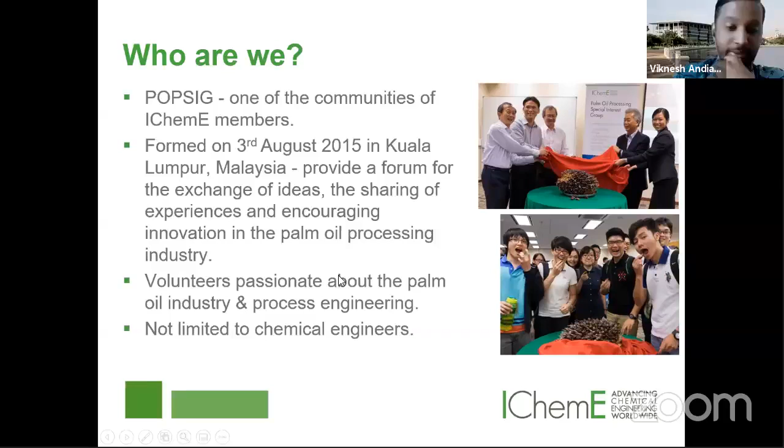We have a lot of volunteers who are passionate from the palm oil industry and from process engineering as well. So a lot of chemical engineers who apply their trade in the palm oil industry come together in our committee or in our events and exchange ideas. But of course, we're not just limited to chemical engineers. And since we were formed in 2015, just last year we celebrated our 5th year anniversary. So this will be our 6th year, since it's already 2021.

What are our objectives as a special interest group? Number one is to share and promote best practices, particularly in the palm oil industry. It's also to encourage innovation. So we'll see what activities we normally run and how you guys can get involved in our activities as well.

So we encourage innovation in palm oil products. Apart from that, we also promote professional aspects in the industry, and we act as a focal point for those interested in the process aspect. Since we are stemming from IChemE, an institute where a lot of chemical engineers come together, we look at the process aspect of palm oil processing.

So what are the activities that help us achieve our objectives? We have technical seminars that we've organized, forums as well, workshops, and in fact webinars and physical evening talks. Before the pandemic, we used to have physical talks, probably once a month on a Monday evening. But since the pandemic, we've converted that into webinars. So every now and then, if you're a student member, you would get advertisements or emails from IChemE about the webinars we organize.

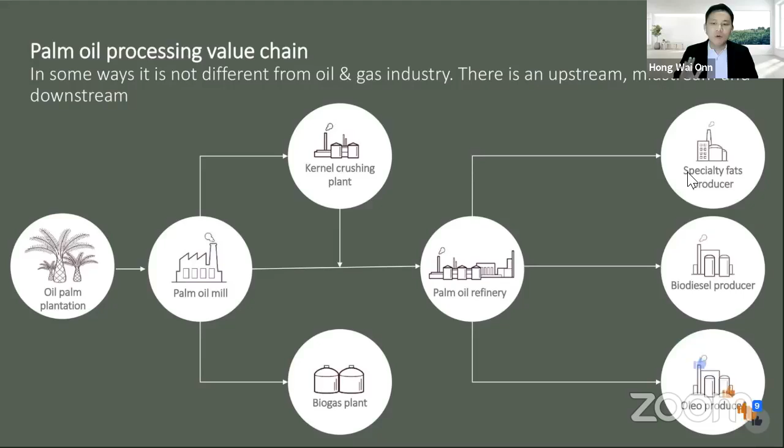In terms of usage, about 70% of palm oil is used in the food industry, maybe 10% in oleochemicals, and the remaining 20% in the energy sector, for example biodiesel.

From a helicopter viewpoint, the palm oil mill produces crude palm oil and palm kernel as primary products. There are a lot of unit operations involved in the palm oil milling process, and trust me, many of them are relevant to chemical engineers. Why? Mass transfer, heat transfer, thermodynamics, which I will cover later.

Let's shift gears a little bit. The oil refinery produces refined oil from crude palm oil and palm kernel oil. The refined oil will go through the fractionation process to separate stearin and olein.

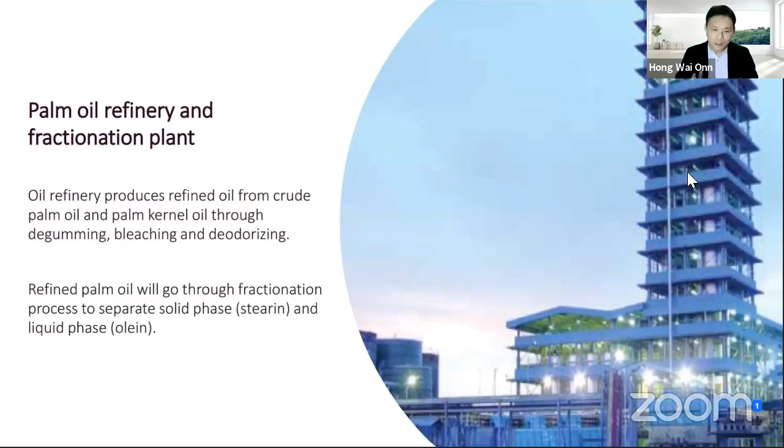Now, come to the fractionation process, or the separation process. Stearin and olein will be separated by means of thermomechanical processes, and typically the final product stearin will be used for margarine production, while olein is widely used in cooking oil and frying oil.

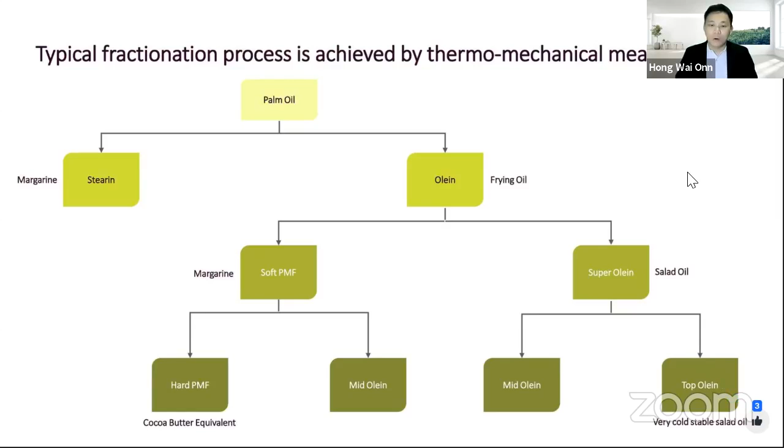Now, next short exercise. Pause for a while, use your device, and tell me what comes to your mind when you think about products containing palm oil. You should be able to key in three keywords. Type in your answer.

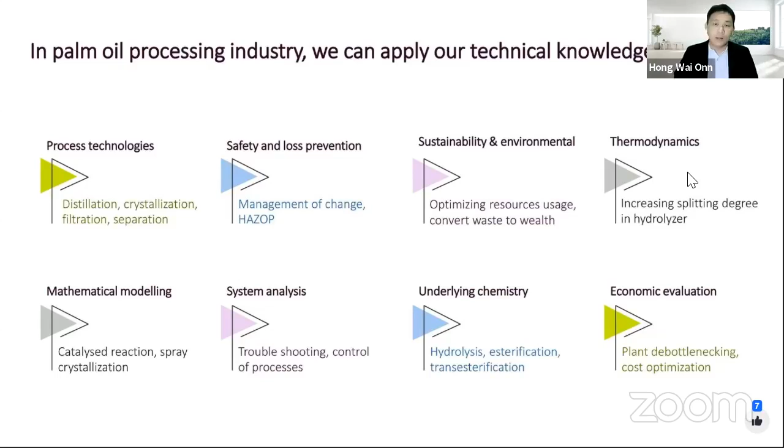Of course, I will not go through all of that, otherwise you become very, very boring. But you can see from yourself.

And when we come to career, it's very interesting to note that, in fact, chemical engineers have a wide range of options within the palm oil processing industry. Is that true? Let's have a look.

If you like plant design, for example, then you could join the front-end engineering and design team, whether it's an engineering company or a design company, you can join them. But when you say, no, you know Hong, I like process control and I enjoy so much the environment of factory, fine.

You could also be a member of the operation team in the palm oil mill, in the refinery, or even in the oleochemical plant. There are many, many choices for you. And of course you could also become a member of the quality and assurance team, just to ensure that the product produced is meeting the specification and requirement. So this is also a key component team within the factory, within the operation team.

And some people say, Hong, you know, I like R&D. Well, if you like research and development, you could even continue to do so. When you are in the industry setting, many palm oil companies basically set up their own R&D center to develop new products and improve existing ones. So this is where you have a space to play.

And some of you like statistical modeling - maybe you could consider becoming part of the continuous improvement team. A lot of people within the industry pick up statistical modeling, eventually they also go for Lean Six Sigma, and then apply all this knowledge basically to help the industry perform even much better, to uplift the standard bar.

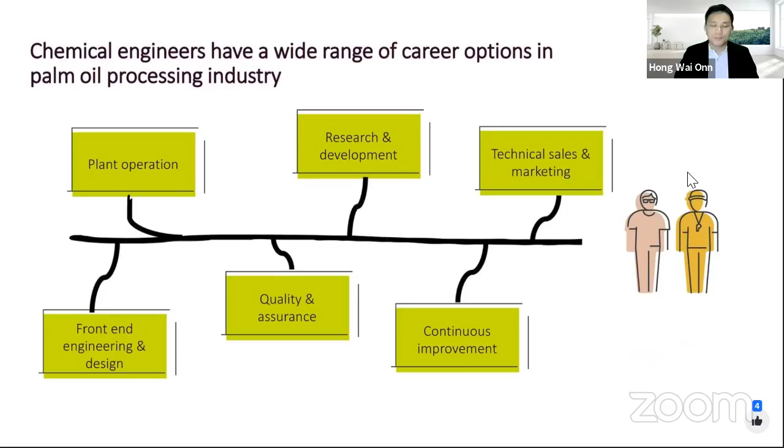So enough. So what are the challenges right ahead? You know, my friends, always I say, from the self-driving car to the drone deliver online shopping, Industry Revolution 4.0 is changing our life. We cannot run away from that.

So what does Industry 4.0 mean for students like you? Basically it is a current trend of automation and data exchange. We can't run away from this trend. And this IR 4.0 basically includes the IoT - Internet of Things, cloud computing, cognitive computing, and so on.

And it is a digital transformation, right? So new skills will be needed to design, to build, and also to maintain these technologies. And very importantly, we need to think critically and we need to be data savvy.

So my friends, don't worry. You are still relevant in the future, and so much so in the palm oil processing industry. We see a lot of palm oil companies basically capitalize on the industry revolution 4.0 to make their process much more efficient. So you have a big role in future.

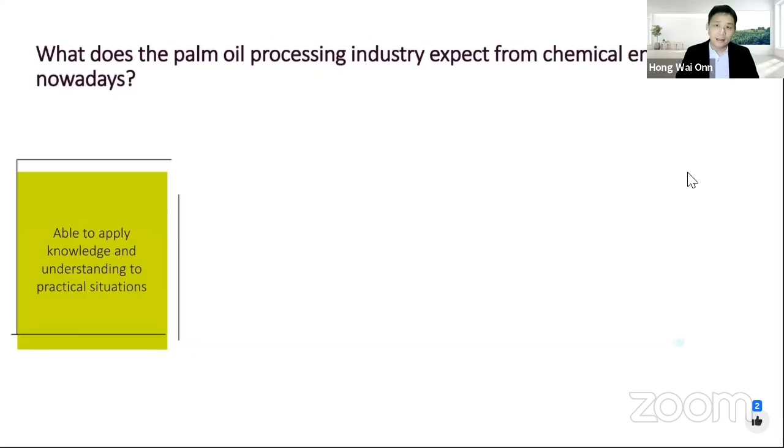Another question is, what does the palm oil processing industry expect from you, from fresh chemical engineers like you guys? Very important. You must be able to apply your knowledge and understanding to practical situations. Not just learn, but also you need to apply it in practical solutions. And the industry will expect you to manage the relationships.

And you have to lead people from different backgrounds, right? And of course, you must also be able to communicate your idea, be it written or verbally. You need to be able to articulate your ideas. And on top of that, I think it's very important that you must commit to a high standard of professional and ethical conduct.

Last but not least, commit to continuing professional development. To me, this is very important. Your degree transcript is just a key to open a door, isn't it? And you need to continuously pick up new knowledge throughout your career life. So don't stop, don't be complacent, even though you get a good degree in your university, because you need to continue improving your competency throughout your career life.

In order to develop and excel in the career, to me, it is actually connect to create. Connect to new people, unleash energy across your network. Why? Only by connecting to new people, you create new ideas, you create new opportunities, right?

If you are in doubt, let's say after a few years you've left the university, if you are in doubt on the fundamentals, back to the basics, don't panic. We don't expect you to memorize everything that you learned in the university, but back to the basics, right? Ask Mr. Perry, don't ask Hong, yeah? Maybe Hong also forgets. Ask Mr. Perry, isn't it?

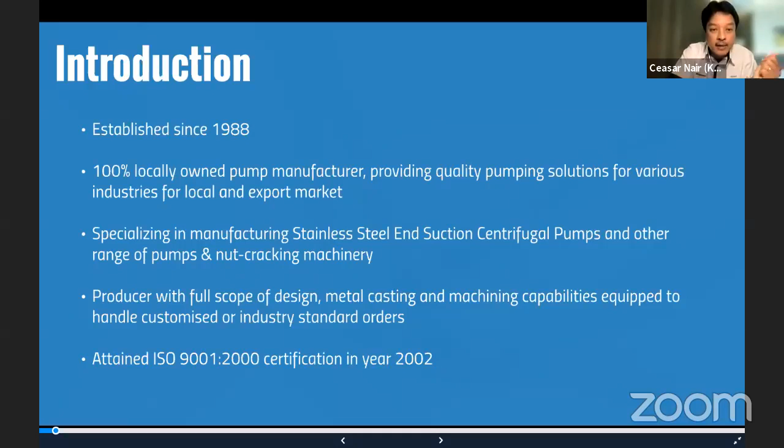Right, so a bit of background on pumps. Actually, pumps are the second most used machinery in the world after motors. Perhaps not many people know that, but wherever you go in a plant, wherever you have liquid that needs to be moved from one process to another, you need pumps. So basically that covers a lot of industries, oil and gas, palm oil, and so on. So it's actually a very vital equipment, like a heart. If a heart breaks down, the body stops functioning. So a pump is very critical.

Our growth in the industry started off in the palm oil industry and has gone on to other industries. We are quite happy in the sense that we have the trust of many industries, because given the criticalness of pumps, our brand has earned its reputation for being reliable and so on. We are very happy now to not only be used locally, but we export to over 42 countries around the world. We have replaced many imported pumps in Malaysia and overseas.

Some of our clientele include Petronas, Kimberly-Clark which makes paper and pulp, Wilmar which is a very big group, Sime Darby, and so on. We're of course very committed to continuously improving our products, innovating, and supplying the needs of pump users in Malaysia across all industries.

So we'll just go on to a little corporate video for you to see a bit of our company, and you can see some of the processes within this video.

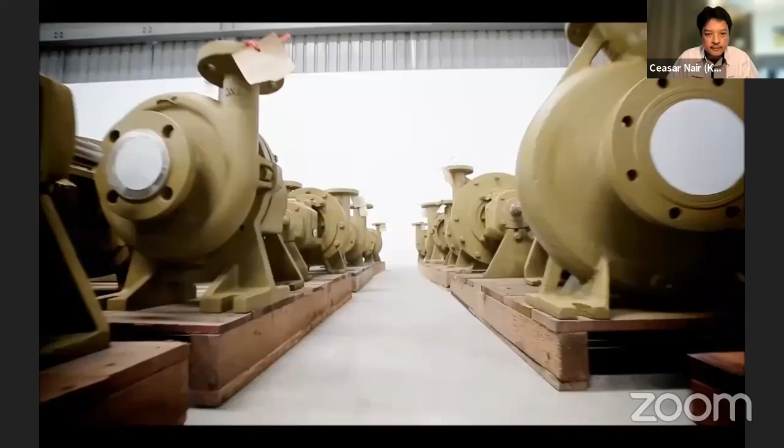We go to the extent of bringing the customer's problem and issues back to our facilities, have a hard look at them, and determine how best we can solve it.

Our pump solutions are a combination of high performance, reliable, and yet cost-effective. Going forward, we aim to bring these unique solutions of ours to more users, both to new industries and to expand our client base around the world.

Since the time we started in the late 80s, KEWPUMP has exceeded our expectations. From a 3-man setup in a 300 square feet space to our present 280,000 square feet integrated facility, we now serve over 24 countries and enjoy a strong reputation because we introduce new ideas and innovation to our customers, saving them a lot of downtime and maintenance costs. Even till today, we are still thinking of new and improved ways of doing things.

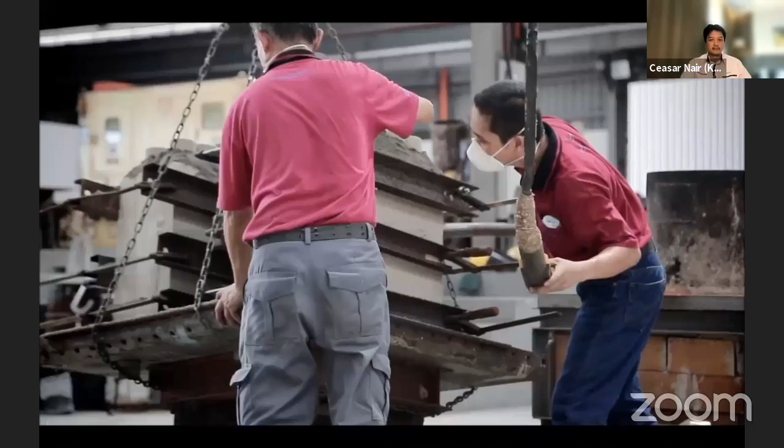We don't see a pump as a pump by itself. We see pumps as a very critical component in our current operating environments, and we want to ensure that our pumps keep functioning even when other surrounding equipment stops working. So we design our pumps like the concept of a heart.

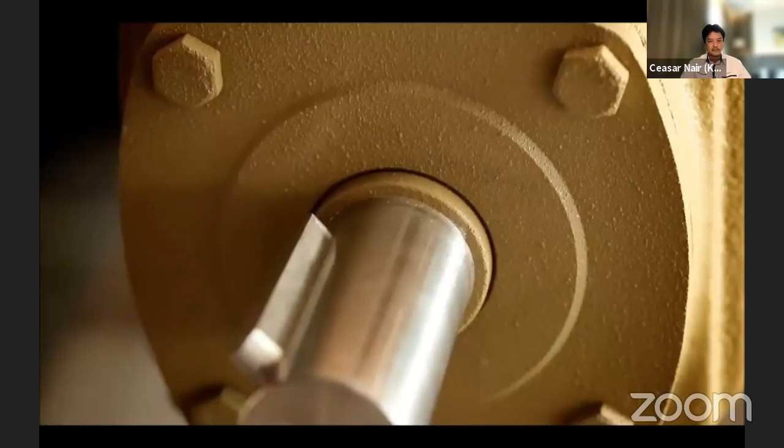The heart is a very important organ in our body. We want it to keep functioning, keep pumping 24/7, so we have complete peace of mind. And that's why we choose the tagline 'keep pumping' to best describe our design philosophy.

To achieve our design concept, where our pumps need to perform reliably and efficiently under the most demanding working conditions, the main parts of our pumps need to be machined to tolerances measured in microns. We also have to ensure that this high level of precision is maintained over a high volume of production. So to do this, we employ highly advanced production technology and a very stringent quality management system.

The main parts of our pumps are all produced in our in-house foundry and subsequently processed in our CNC machining plant center. Some of the machines we use here are the same used to produce Formula One race car engines.

To sum it up, we have award-winning products and brand name, a loyal and experienced workforce, a strong and dedicated management team, and with our continued commitment to come up with better pump designs and solutions, we aim to give customers a greater level of satisfaction with our products - what we call the KEWPUMP experience.

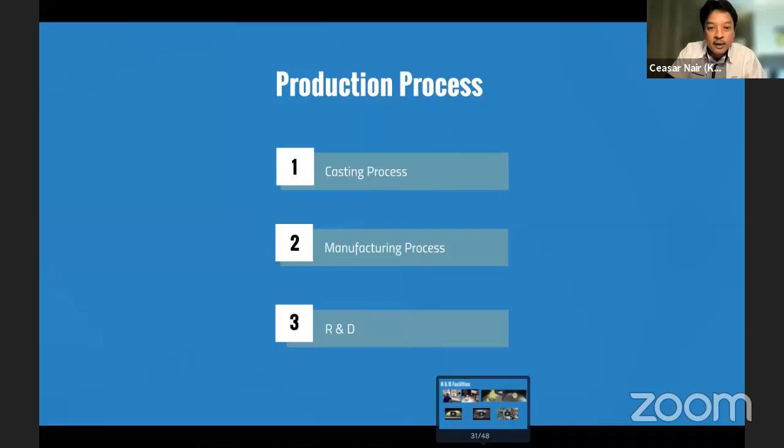Okay, so in the casting process, basically it starts with the pattern making. This is where it all starts - in terms of, let's say you make a kueh, right, you need the mold to make the kueh. Basically, when we make the pump parts, we need the mold where we pour the molten metal into, and then it produces the shape, the pump part itself.

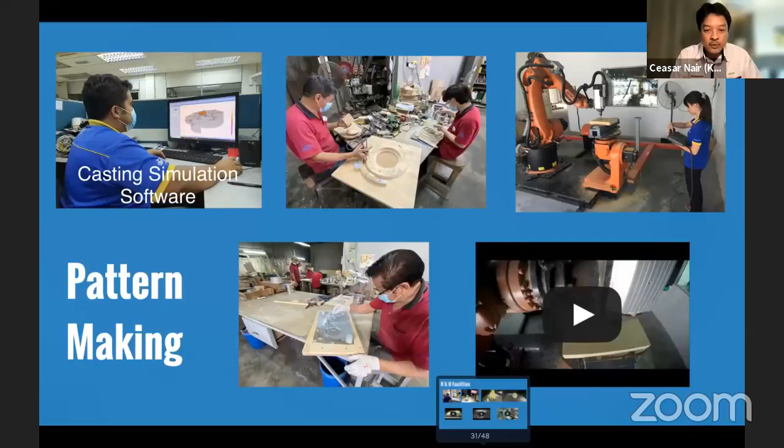So we have to design the part first, of course, from the engineering department, and then it goes to the casting plant here, and we use a simulation software. The simulation software simulates how the metal will go into the mold.

And it'll actually kind of try to help you identify where are the hot spots where the metal, perhaps one section is thicker than the other, so it'll solidify slower. So that's where potentially you have some shrinkage issues, like that could result in holes and so on. So anyway, all this can be worked out with this simulation software, and from there we'll know how we want to do the setup.

Okay, so you see here a wooden pattern, right? The pattern is actually used to make the sand mold. You can see from the pattern, the shape of it, these are the parts that's going to be produced. We have these two sifus here, combined they have experience of about 80 over years working in this industry. It's not an easy industry to work in, because in this particular function you need an engineering mind, you need also a craftsman's creativity with your hands to work the wood.

So in anticipation of perhaps not being able to find replacements for them, we have had to turn to technology such as this 8-axis robotic arm called KUKA. So this KUKA machine basically can handle the part of the wooden working part. So you can see it milling the wood over here.

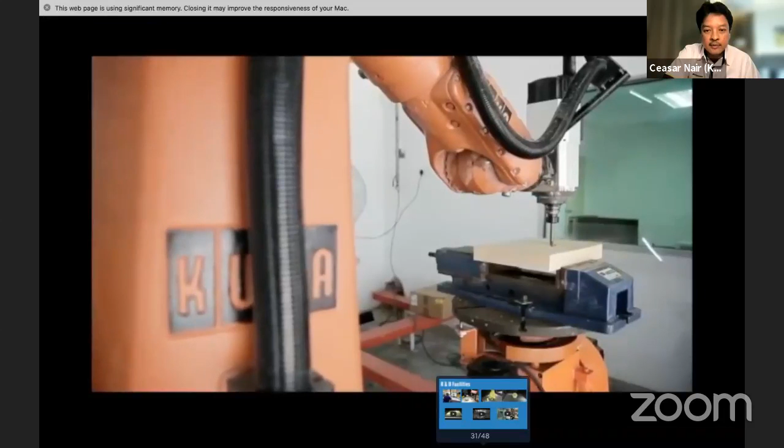So this is kind of our robotic pattern maker, but you still need someone to design the pattern. So that's where we use engineers. So from the pattern, what we will produce, or what we want to produce, is the mold.

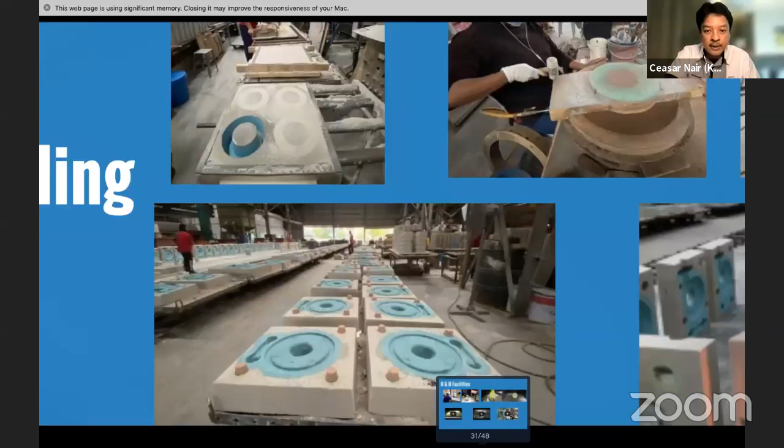So you can see the different pictures here. These are all sand molds. So this is the sand molding line. Basically you can see the sand molding line, the wooden pattern is there. You can see the sand has been put into the wooden pattern. Basically it's hardened by a binder. The sand has a binder included into it. When it's set into the wooden pattern, it will harden by itself after about 15 minutes. And subsequent to that...

Yeah, you would see this another form of a wooden pattern with the sand mold inside. And okay, so when you knock out the sand mold from the wooden pattern, this is what you'll have. You see the blue areas in the center - those are actually the area where the molten metal will actually sit. So this special coating, this blue coating, is put so that the molten metal does not gel with the sand.

So here you can see the blue coating. It has a solvent inside which is flammable. So once it's coated, it will be lit up. Then it will dry out whatever moisture from there.

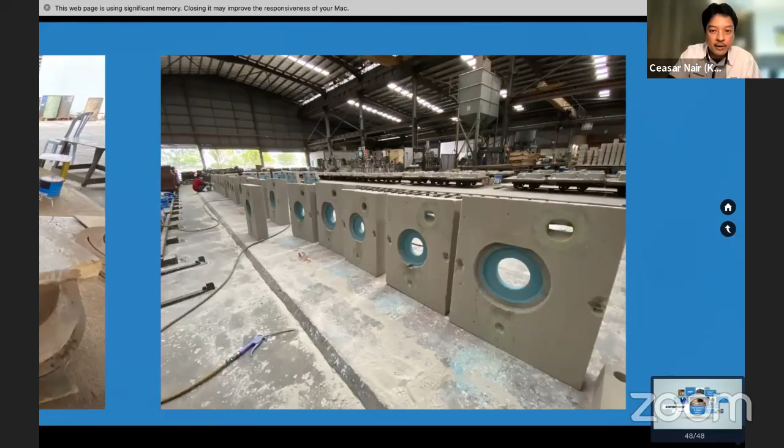And you can see all the different sand molds being in a standing position. And here they have been then taken and put on the trolley. And this is our molding line that basically is like a rail track line. It will then head towards the furnace at the end. Of course, the molds will be closed first. And then the metal will be poured into the mold.

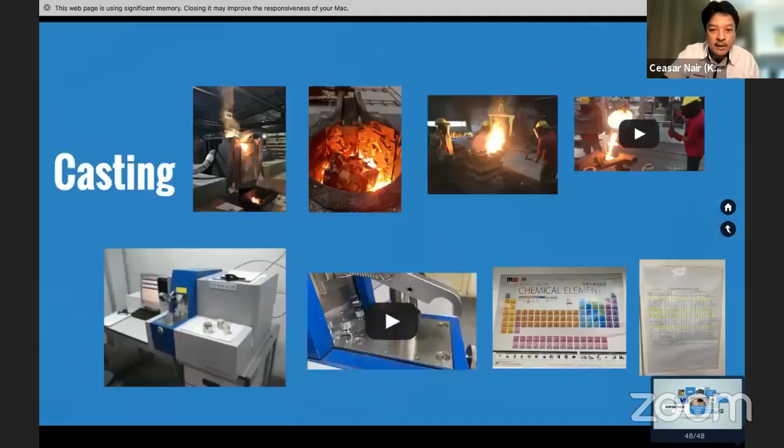So this is where the casting part comes in. Okay, so casting is basically casting metal into a mold. And the metal is first melted in this furnace. This is an electric induction furnace. The furnace melts basically the metal, whatever raw material that we put in. It goes up, it ranges from 800 to 1,000, 1,600, 1,700 Celsius, depending on the type of metal, because aluminium to stainless steel have very wide range of melting temperatures.

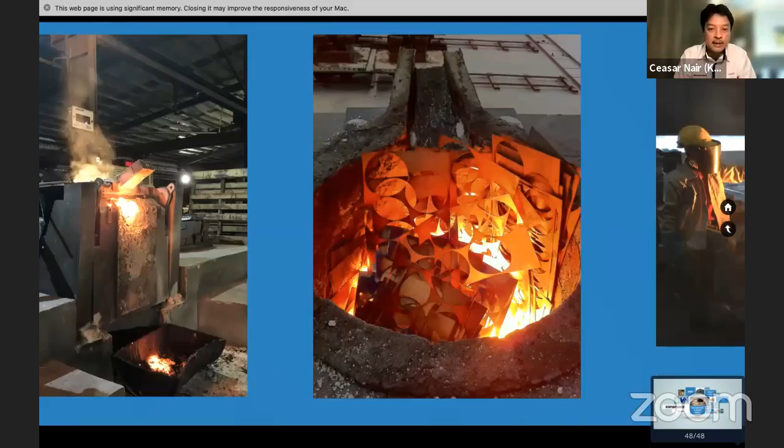And the raw material that we use, as what you see here, this is an example of it. These are actually very good quality plates that come from other factories. Perhaps they stamp out the parts that they need, like in the automobile industry. Then these plates that are left over are scrapped to them. But of course, it's very good quality raw material, which we use for our melting.

And here you can see this is called a ladle. Okay, so the ladle is basically carried by an overhead crane. So from the furnace that you saw earlier, it will be transferred into this ladle, and then the ladle will transfer the molten metal into the sand mold. You see the weights on top of the sand mold - it's there to hold down the upper half of the sand mold because the density of the metal is very high. So when you pour the molten metal inside, it could actually lift up the whole upper half of the sand mold. So that's why we need to put all these weights in.

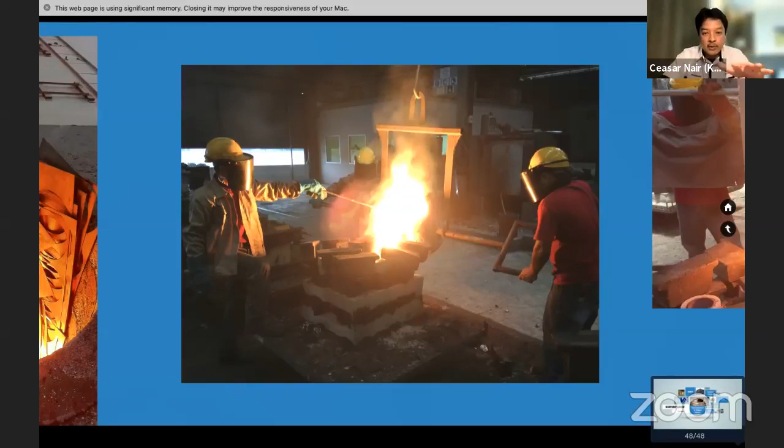If you were standing where I was taking this video, you would feel the heat, because this is metal at 1,600 Celsius. It will be poured into the mold, and has to be poured in a controlled manner to avoid turbulence of the molten metal as it goes in. We always tell our staff that one of the benefits is having a free sauna in the casting plant.

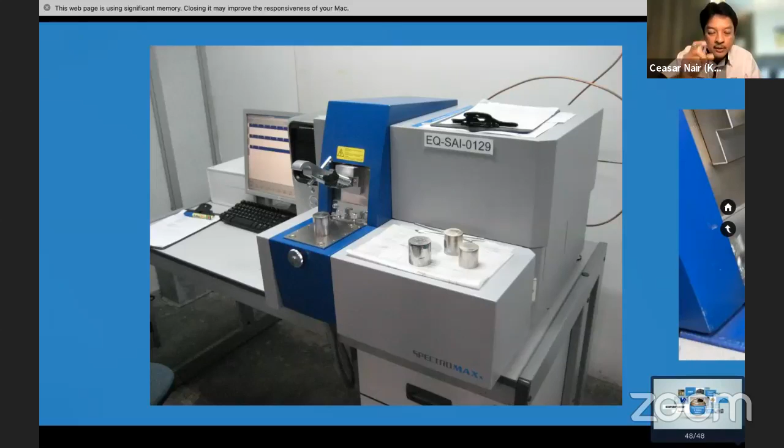After the metal is poured, or rather before that, we take a sample from each melt in the furnace to test the metal composition. This is a spectrometer. The sample is placed on it, and below there's a point that emits an electric spark, burning off the surface of the sample. From the light reflected off the burned area, we get a spectrum of lights, which is why it's called a spectrometer.

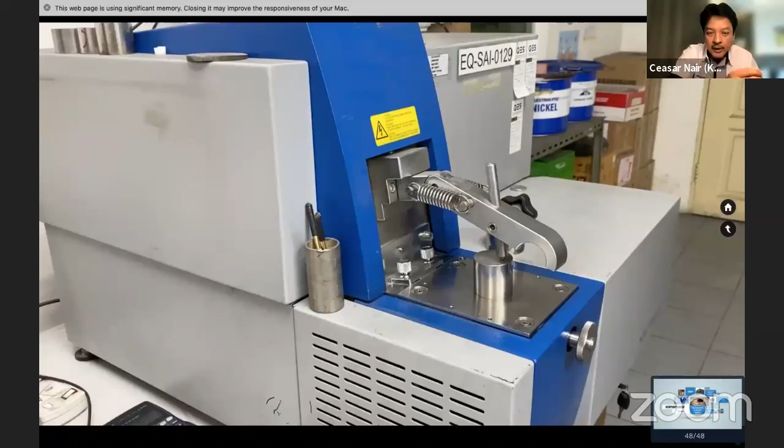Each alloy has a different spectrum of light, and this machine reads the spectrum, feeds it through its processor, and tells us what the components are, for example chromium, molybdenum, nickel, and so on, and in what percentage each alloy is present in the sample. This way we know the molten metal we poured complies with what we want and what the international standard requires.

For example, stainless steel 304 has 18% chromium, 8% nickel, and so on.

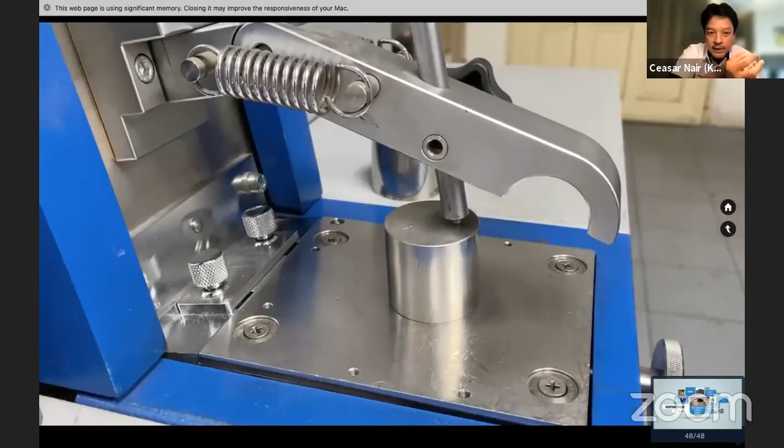Why is this important? Because with the right composition, the metal will solidify in a certain crystal structure, like austenitic structure involving carbon, silicon, manganese, chromium, nickel, molybdenum. Only when you have the right composition and the metal forms a certain structure, like a diamond has a certain structure, do you know it can stand abrasion up to a certain degree, corrosiveness up to a certain degree, and what type of acid it can take. That's why it's very important to nail down the composition.

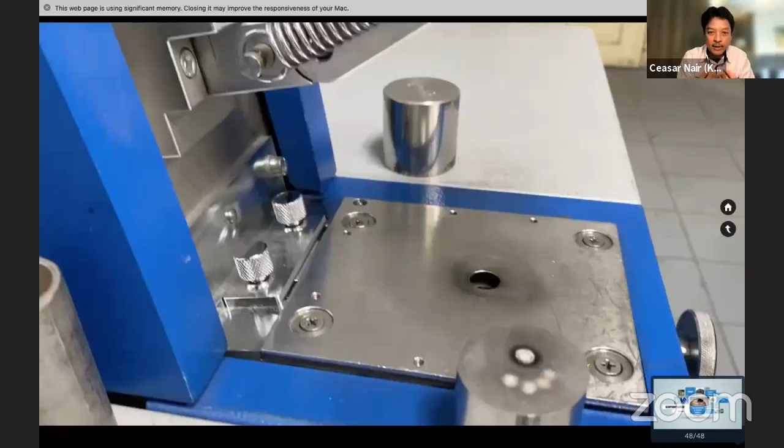This is why we invest in spectrometer equipment like this, to ensure that all the metal composition makes up what is targeted.

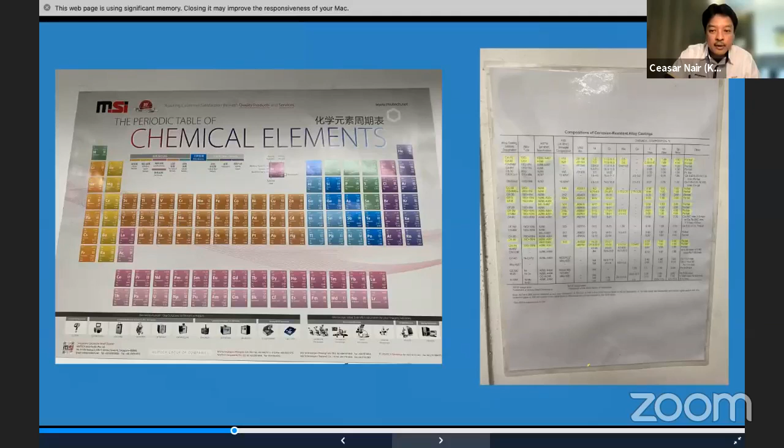So that's the casting process in a nutshell. After casting, the parts are cooled down, which takes about 24 hours. The next day, they're knocked out from the sand molds, which are only one-time use, and the parts are then cleaned.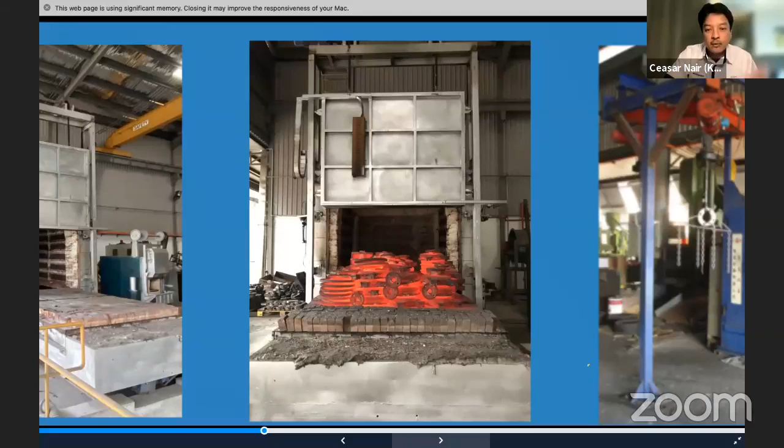So from the casting process, we now have the raw parts, which go to the manufacturing process. The manufacturing process covers machining, pressure testing, impeller balancing, QC, and assembly.

For machining, we have these raw metal parts that need to be machined. The purpose is that different areas of the part need to be mated or joined to another part, so where those two parts need to be joined, it needs machining to create the mating surface - a proper fitting, so there are no leakages or gaps in between that would cause the parts to vibrate.

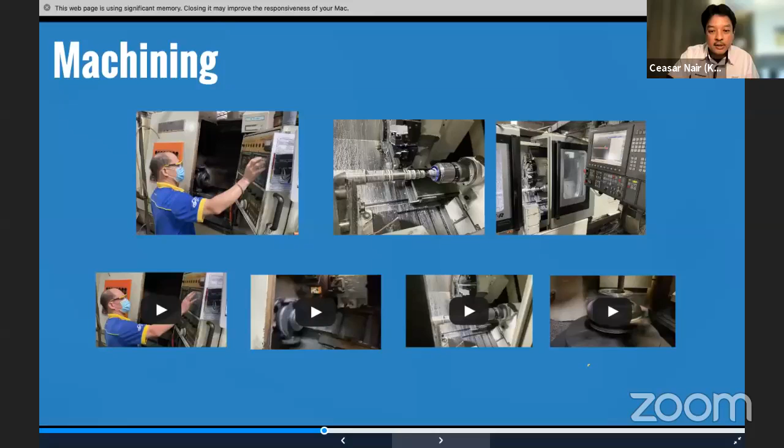So this is just one of the CNC machines. The CNC machines are basically computer controlled. It's programmed, so the operator here is programming the machine to run a certain program, basically what to cut, where to cut, how much to cut, to what depth, and so on.

And this is a little video. Here the part is turning. This is called a lathe or a turning machine, where the part turns and the tool is stationary. A milling machine is the other way around, the tool turns and the part stays stationary.

So these are some further examples. We want to highlight this machine too, because this is the shaft machine, the machine that machines the shafts. This is a very critical part, of course, because the shaft rotates at a few thousand RPM. It has to be machined very linearly. That's what makes a good pump also, because if the shaft does not get machined properly, there will be some extent of vibration, maybe not felt physically, but it will be there. That's what deteriorates the seal, causes the pump to vibrate, and then have high wear and tear. You can imagine if your car engine has a lot of vibration, it won't last very long. So this is the machine that machines the shaft.

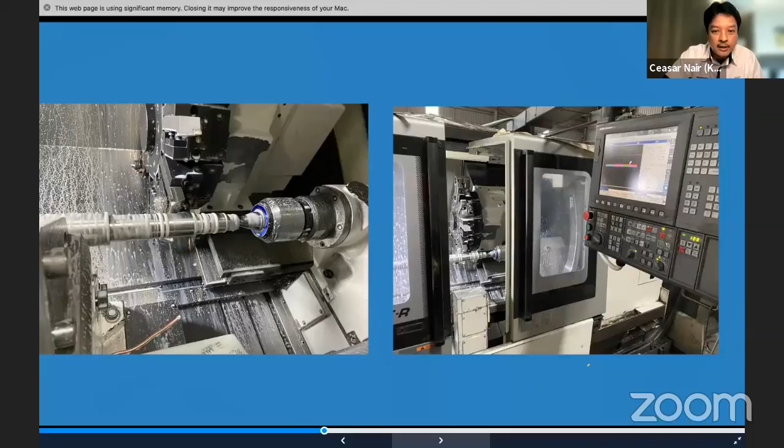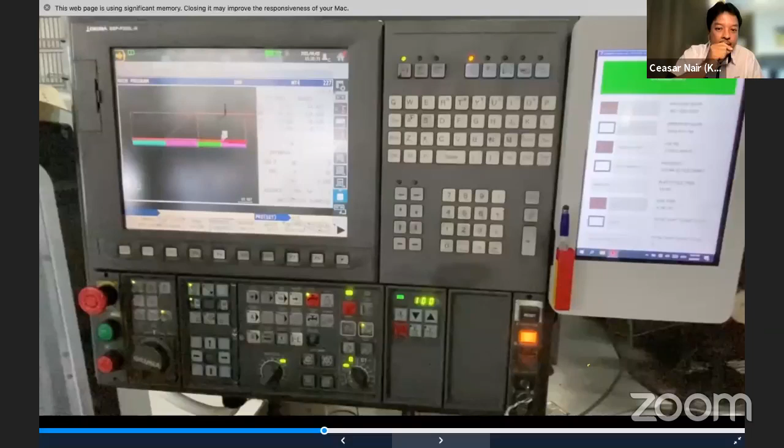So you can see as the machining process is going on, the tool is cutting it, following the program set, and you can see the chip that's produced, and then the coolant. All that liquid is basically the coolant or lubricant that helps the tool to machine and cools the part down so there's no expansion. These machines are very precise. These are Okuma machines from Japan. They can go up to tolerances of like 5 to 15 micron, or 10 micron. The human hair is 100 micron, so you can imagine 10 micron is a very small figure.

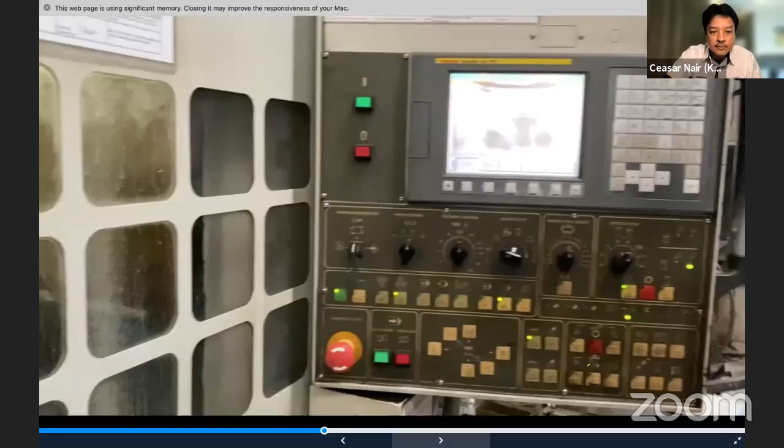This is another machine. This is a pump casing, for example. This is a vertical lathe machine. These are for bigger parts. The tool is from the top, that's why it's vertical, and then the part is at the bottom. So it's machining the flange or the suction part of the pump. We will go into that a bit later on. This is the control panel. All right, so that's the machining process.

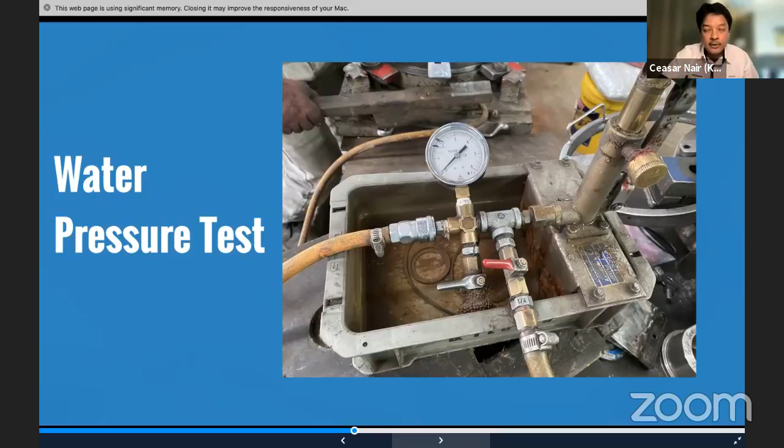So after that, we have this process called the water pressure test. These are for all the parts of the pump that basically hold pressure, because a pump is basically a pressured vessel. It has to have pressure inside, and through that, the liquid can be forced out into the next process. So this is just a water pressure tool that we will set. Let's say this pump is supposed to perform at 6 bar of pressure, so we will test it to, let's say, 12 bar. Maybe we will ramp it up, then seal all the openings in the pump casing, and then put it up to 12 bar, and see if there's any leaks. This is just a QC step. And then for the impeller, very critical also.

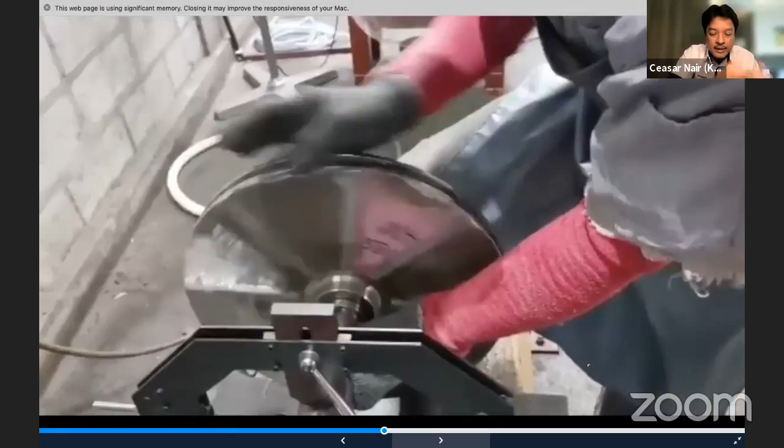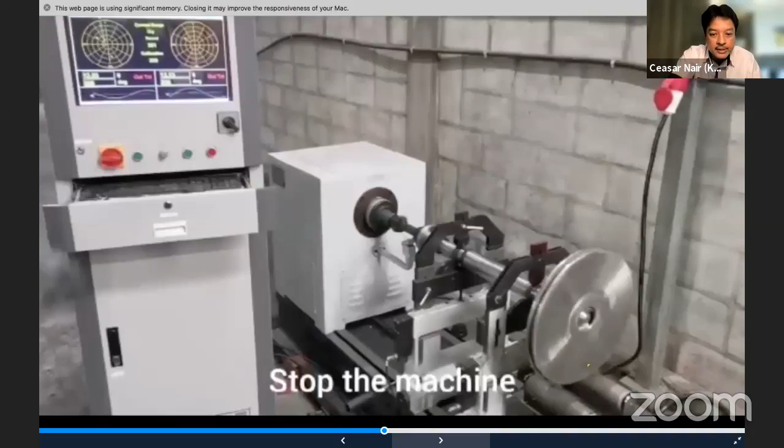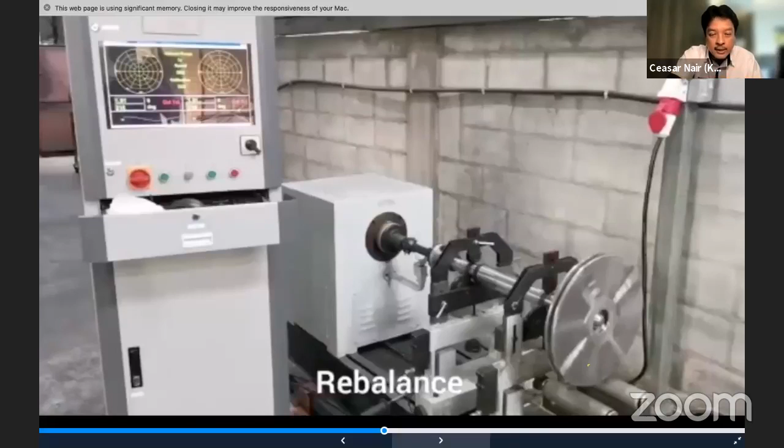These are the critical steps we actually do. This is the impeller balancing. The impeller is one of the rotating parts, together with the shaft of the pump. So kind of like your car tire, when you fit a new tire, you have to balance it, because nothing can be manufactured perfectly. So like this impeller, it's casted, as you can imagine, perhaps some parts might be a bit heavier than others. So what this machine does is it computes using its sensors and a computer, and will tell you the coordinate from 0 to 360. So this impeller has a bit of extra weight imbalance at degrees of 306, a certain area. It will be marked, and the machine will tell you how many grams it is out of balance by. So by experience, we will remove that excess metal in that area, and run it through continuously until we get a reading that the impeller is balanced. So when it runs in your pump, you won't have vibration problems, you will have lesser maintenance issues, and so on.

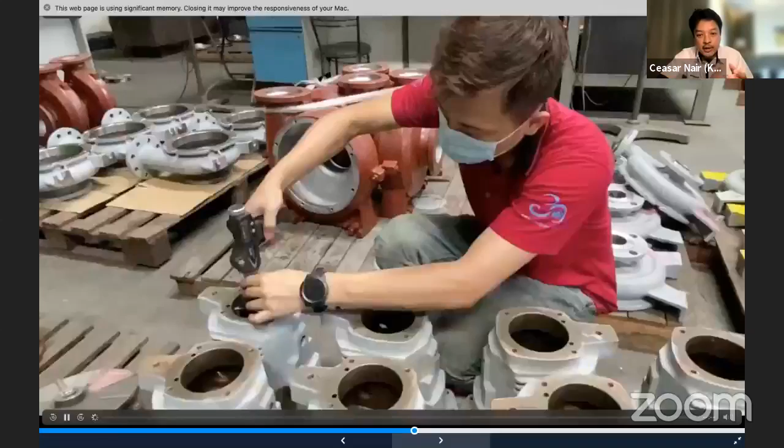Very important, because when the bearing runs with the shaft in it and vibrates, it will heat up, and when it heats up, it expands. But then the area that it sits in has to hold it firmly. So it has to be a very precise dimension that is able to hold the bearing, but also not get too tight when the bearing expands.

So that's why we have to use equipment like this, it can give you up to micron level precision. And this is another equipment we use for QC and dimensional checks, this is called a CMM machine.

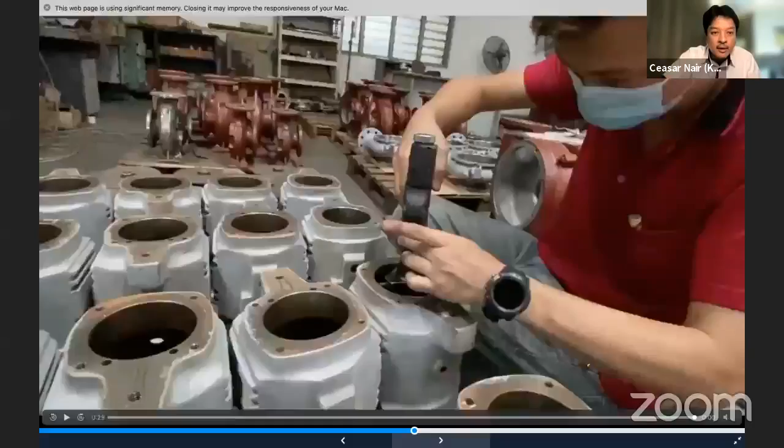Basically, the machine has a very flat table, usually made of marble, and it works on a fixed axis. Here we're doing a part for the first time, so we're programming it. This probe, you can see at the end, there's like a needle-like probe. This CMM machine will move it around.

It touches different parts of the part, so it can tell the coordinate of that part, let's say at the bottom. Then as it moves up to another point, it will touch again, so it can tell the difference between the first point and the second point in a very precise manner. We're talking like 5 micron, 3 micron kind of precision. That way we know these parts are precisely machined so that they fit well, that's the most important thing.

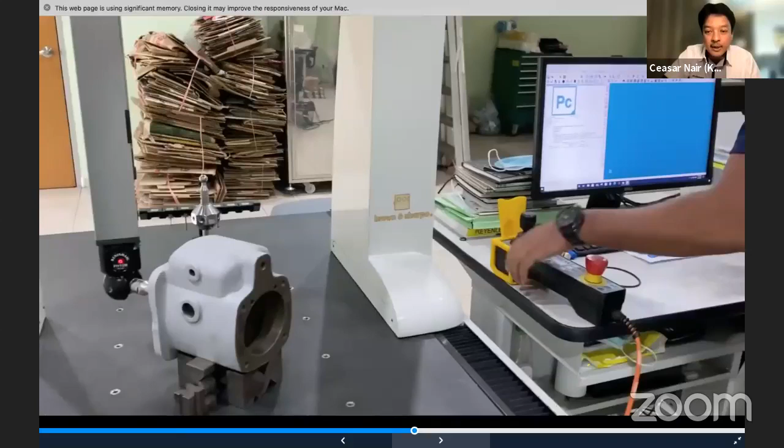It fits well together so that you won't have areas for vibration and your pump can last a long time. If a car, for example, vibrates wrong, very fast the car will start to give problems. Similarly, for a pump that works with the same principle.

So after all the parts have been checked for dimensional accuracy, we can start to assemble the pump. Here you can see the pumps are assembled not like a car production line, because all these pumps are made to order. Each pump is basically handmade, hand assembled one by one, because one customer may need a number of pumps with different configurations of impellers, materials, sealing systems, and so on. That's why each pump has to be made to order, specifically custom built.

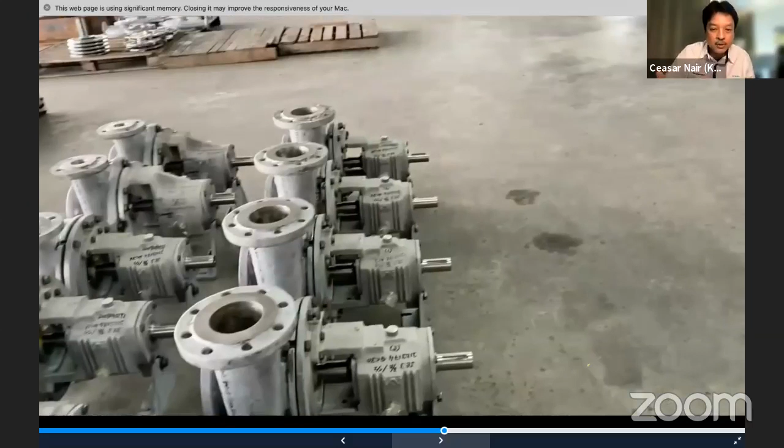So I like to term it like how a Swiss watch is made, hand built, handmade. But of course, our pumps are much cheaper than Swiss watches.

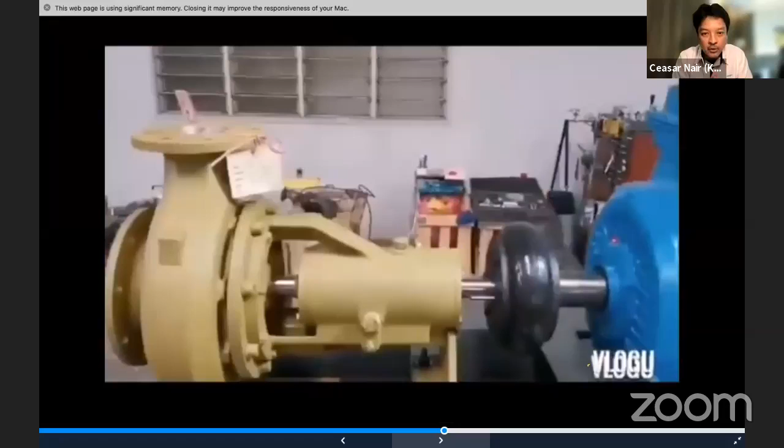After we assemble the pumps, if the customer requires, we then have to couple the pump to a motor. If the customer just needs a bare pump, maybe it's a replacement and they already have the motor in place. But if they need a motor like this, the pump will be placed on a base plate. You can see the base at the bottom, coupled meaning joined to the motor.

The shaft of the motor and the shaft of the pump have to be perfectly aligned. There are other traditional ways of doing this where they use a ruler and so on, but we use one of the most precise ways, this is a laser alignment machine.

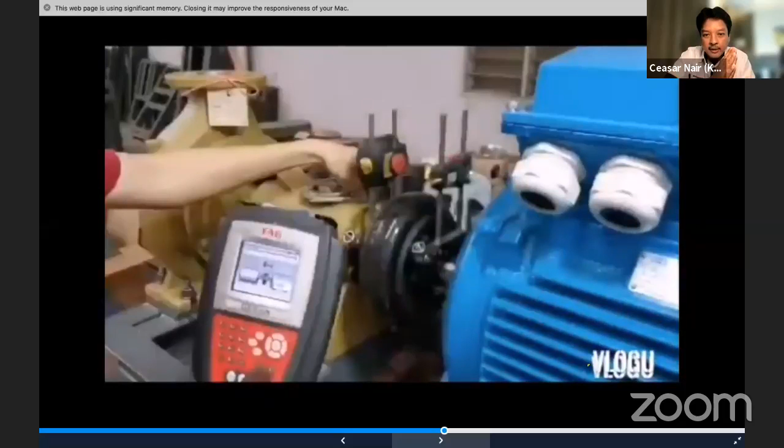Basically, you see the red cap there, it's like a lens cap. Later, the technician will take that out, and there'll be a laser that is able to align from the pump shaft to the motor shaft, and it'll tell you exactly by what measure it's not aligned, and which area, whether it's left, right, top, bottom, and so on. Then the technician will know what he needs to do, basically adjusting either the level of the motor or the level of the pump.

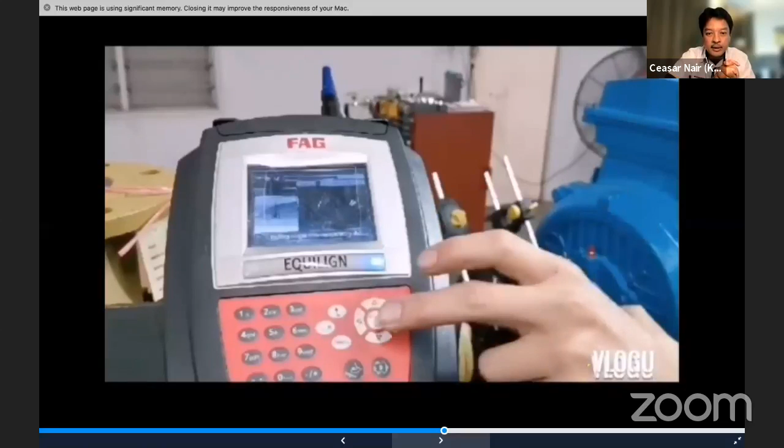So this is a German piece of equipment, this alignment equipment here. Right, so you can see now he's loosening the motor. Right, then you put a shim, right?

This is very important for you guys also, because in future, when the pump is installed, it's aligned at our factory, but when it's shipped to your place, handled by a forklift, a truck, it goes on the ship perhaps, and so on, all the handling might just cause the pump alignment to run out a bit when there's movement. So it needs to be aligned again at the site. So either if you guys have the knowledge and equipment, you can do it, which a lot of companies have, or you can call people like us to come and do the alignment.

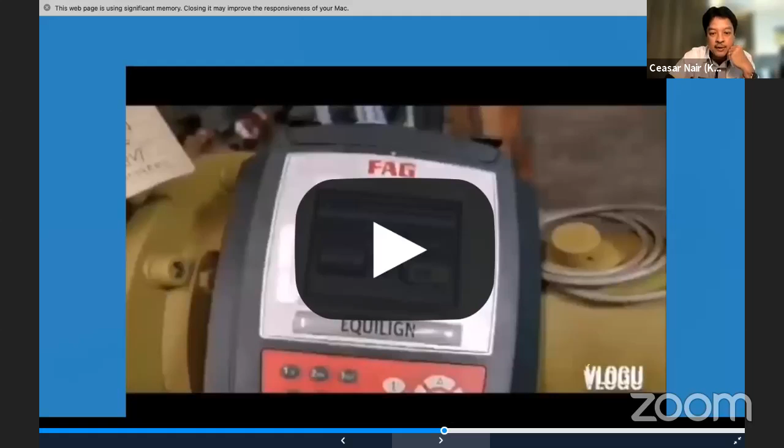Right, so that covers the manufacturing process. So now we have our pumps, and within KEWPUMP itself, we have a lot of R&D, and this is some of the things that we use, like this AutoCAD software. We have 3D modeling.

You're out. How come? Yeah, sorry, we seem to be kicked out from here. Must be some software thing. Yeah, could be the line. Bear with us a minute.

This is actually our first virtual tour of a factory in our history of KEWPUMP. So must congratulate you guys, you are the very first people who actually have come to our plant in a virtual way.

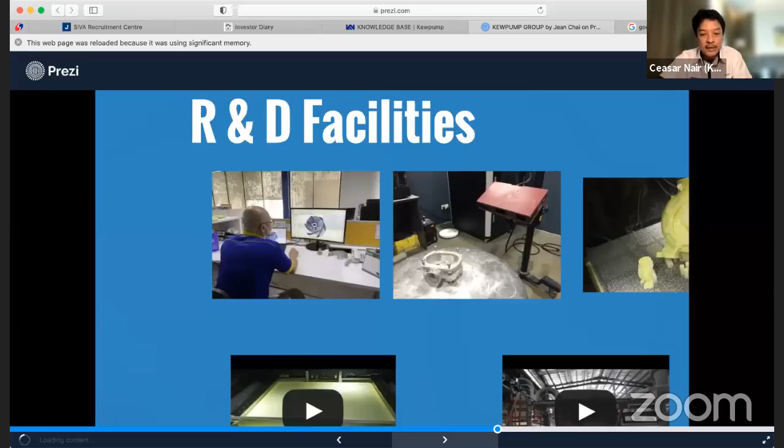Okay, so you can see the AutoCAD software we use. This is a 3D scanner, we use it to scan our pattern molds and certain parts, to keep it in electronic form, and we can do further R&D by scanning it.

And this is a 3D printer. We use it to make prototypes. We also use it to perhaps, earlier you saw our wooden patterns, because we need to prepare for when perhaps we won't have the skilled craftsmen to make the wooden pattern, so we will print out in ABS.

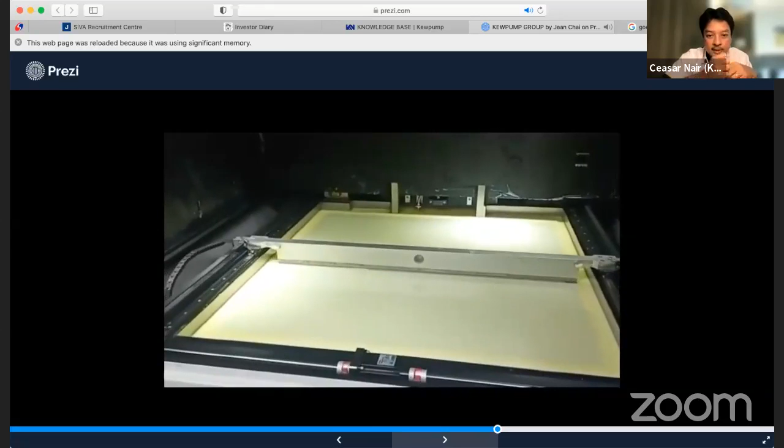This 3D printer basically prints out - you have a 3D drawing and you put it into the 3D printer. So what the machine is doing is it has the 3D drawing, it will level - this is liquid ABS, so it will level the top. The laser will actually shoot, you can't really see it, but the laser will shoot layer by layer, we're talking about maybe 0.3 mm at a time.

And then after it burns and solidifies the top layer, the table will go down, and this bar will go across it again, level it again, and then the laser will again print on it, and then after that it will go down, and so on and so forth. So that way you can see the laser moving there, the bright light, that's the laser burning the part. After that, the table will go down, and this is then done, and it takes hours - depending on the size, it could take 24 hours for example to do this.

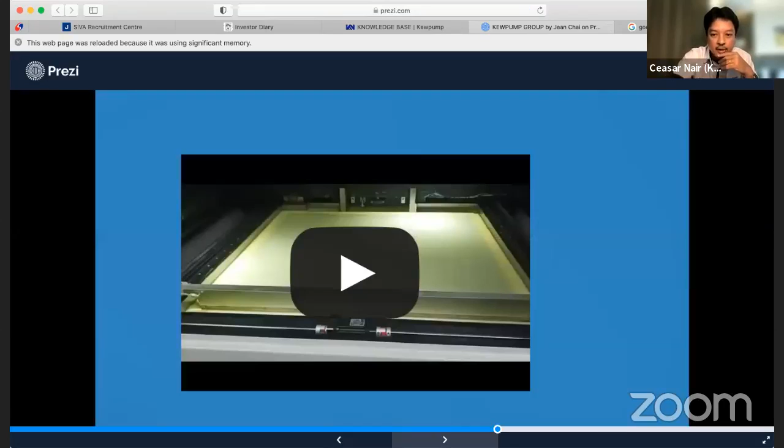So these are the parts produced. Okay, you can see these are still joined, they have this support, so you have to have a support of the part to the table, and you can see it will layer by layer, so you can measure the time taken, 0.3 mm at a time to produce parts like this.

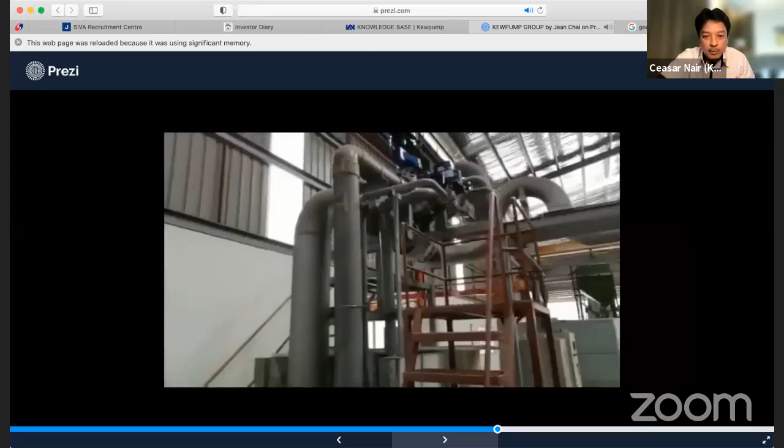So we have the software here, this was developed with a university - UTM actually. We have all the sensors in the pump test bed, it will feed back to the software, and then it will actually tell the reading of the pump performance, so that we can form the pump curve. The pump curve is basically - we'll go into that a bit later - that will tell you what is the performance of that particular pump model. So that's our production process in a nutshell.

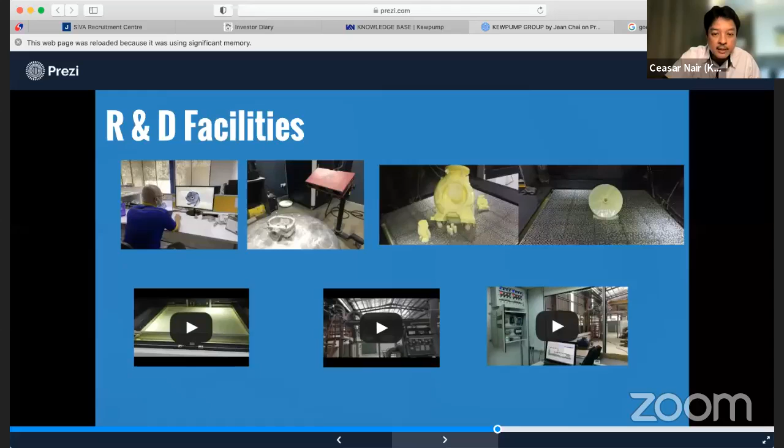So we'll just go a little bit into pump fundamentals. For you guys as future chemical engineers, we can't really go into it in depth because there's a lot of technicalities involved in pumps, so we'll just give you a rough outline of what to expect.

So what are pumps? Basically, pumps are machines to transfer liquid, and they do it by different principles - increasing the pressure of a fluid or creating a vacuum. By doing that, they're able to move the liquid into another process. It's the second most used machinery, as I mentioned.

Generally, there are two classes of pump: one is dynamic, and another works on the principle of displacement. The type of pump that we make is mostly centrifugal pumps.

Centrifugal pumps work on the basis of energy continuously fed in, which turns the impeller in the pump. This velocity is continuously increased, and what it creates is a pressure within the pump that then expels the liquid out, from the inlet to the outlet.

Displacement pumps work on a different principle. You can imagine it like a piston in a car engine - as the piston moves up and down, it creates a certain pressure too, moving the liquid that way. It's not a very high flow kind of method.

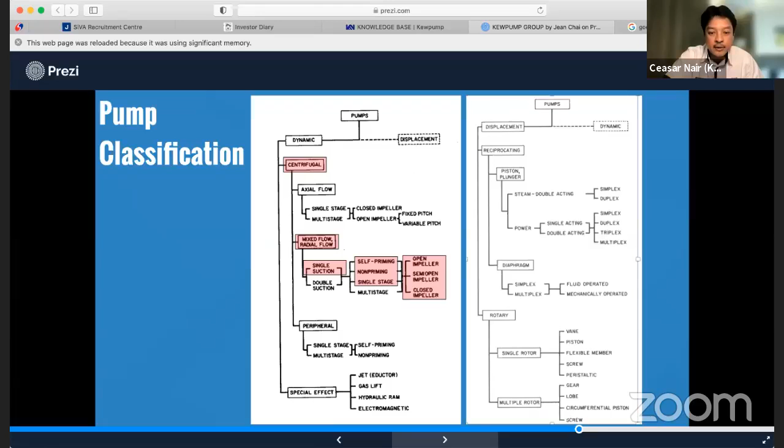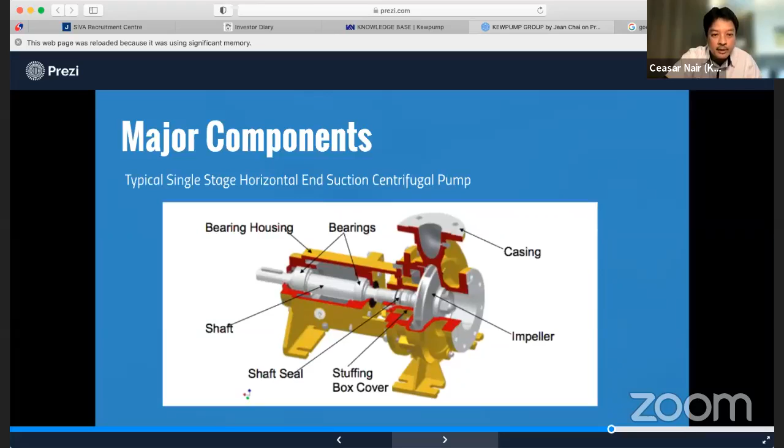Solids like what you have in a palm oil mill, for example - you've got sand, sediments, maybe some parts of the palm husk, nut, and so on. A semi-open impeller would probably be a good balance because it can handle a certain amount of solids, but at the same time it has a certain amount of capacity.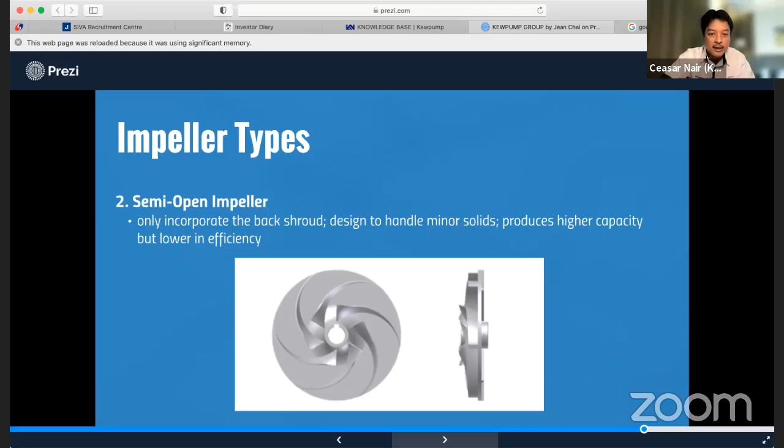So the kinds of impellers that we have are closed, semi-open, and this fully open one - it's like a propeller. These are for where the solids are very big, but of course these are not the most efficient impellers, because there are no plates to hold the pressure and the liquid in, so the pressure, of course, will be a bit reduced.

But of course, it has to be used in its own required applications where the solids are big.

So we come to the pump curve. This time you saw the pump test bed, which basically helps us to arrive at the pump curve. The pump curve tells us what the pump performance is at a given power input to the motor, and what kind of flow we can get. As chemical engineers, you'll need to know how far you need to pump the liquid to the next process, the piping length, how many elbows, the viscosity of the fluid, the diameter of the pipes, and so on. Then you can match it to the correct pump. Each pump curve shows you what it can do, and then you compare it to your system requirement to match it to the correct pump.

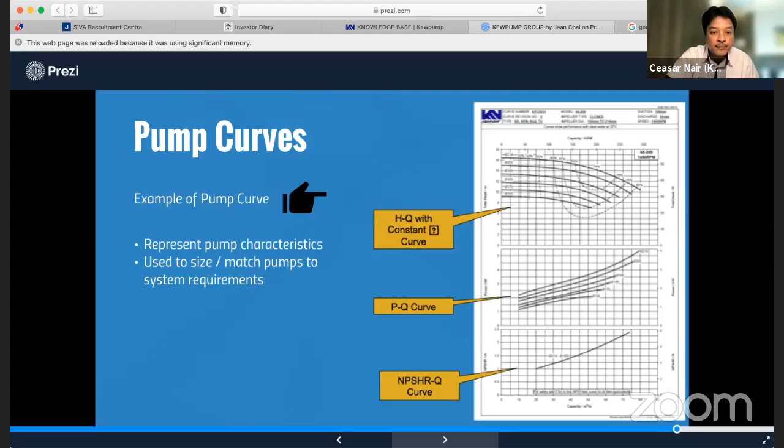So these are the different things you will come across when you deal with pumps: pressure, head, flow rate, specific gravity, viscosity, cavitation, net positive suction head (NPSH), power, and efficiency. These are terms which in themselves involve a lot of detail, but this is just to expose you a little bit to these different terms.

So in a nutshell, that is what you'll need to know fundamentally as chemical engineers if you deal with pumps.

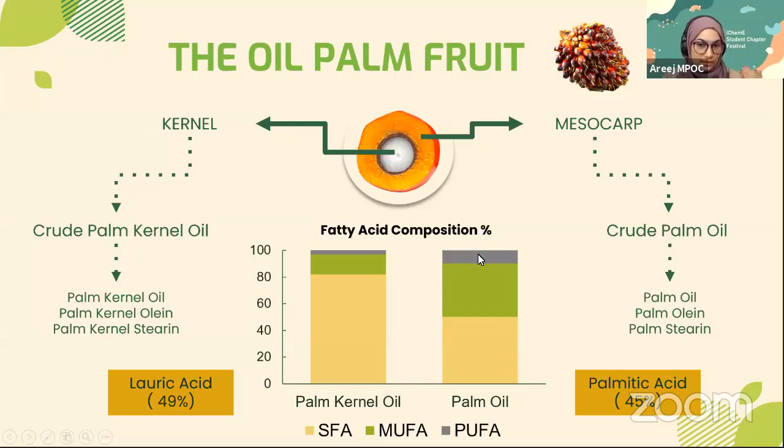In palm oil, it's a bit more balanced - you have 50% saturated fatty acid, where the majority is palmitic acid alone at 45%, and then you have monounsaturated at about 40-45%, and the balance 10% is polyunsaturated fatty acid. So it's very balanced - combination of 50% unsaturated and 50% saturated fatty acid.

So obviously they all function differently - they have different fatty acid composition, but it's not too massive if you compare palm olein with, say, olive oil or soybean oil. So obviously, if you look at the chart before, because of the difference in chemical properties due to different fatty acid composition, they serve different functions.

Like I said earlier, they are applied in food, in renewable energy, as well as oleochemicals, etc. And also, as I said before, palm oil has a balanced fatty acid content. So if you look at this chart, if you move towards the right side, the oils are less stable.

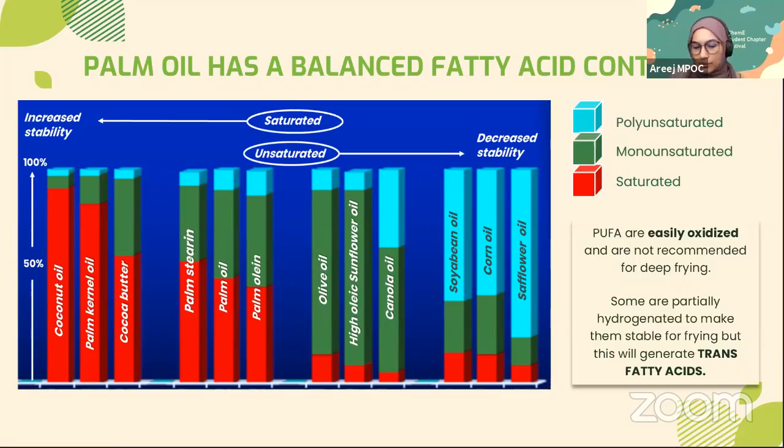Right, so let's talk about the main thing here - nutritional benefits of palm oil. But before we go further into that, maybe we can ask ourselves, is saturated fatty acid truly bad for health?

It's been said all around that saturated fat has a negative effect on coronary heart disease risk. However, recent studies have shown that there is no particular evidence that reducing saturated fatty acid consumption reduces cardiovascular disease risk. There is no concrete evidence just yet.

Palmolein showed similar effects on total cholesterol and LDL cholesterol levels when compared with MUFA and PUFA-rich oils, such as olive oil. A study has shown that the effects palmolein has on total cholesterol and bad cholesterol, LDL, compared to olive oil, are rather similar.

So if you were to just put a blanket statement on all saturated fat and say it's bad because it increases LDL and so on, it's not necessarily true. At the end of the day, studies have shown the effects are quite similar to an oil rich in unsaturated fatty acids, such as olive oil.

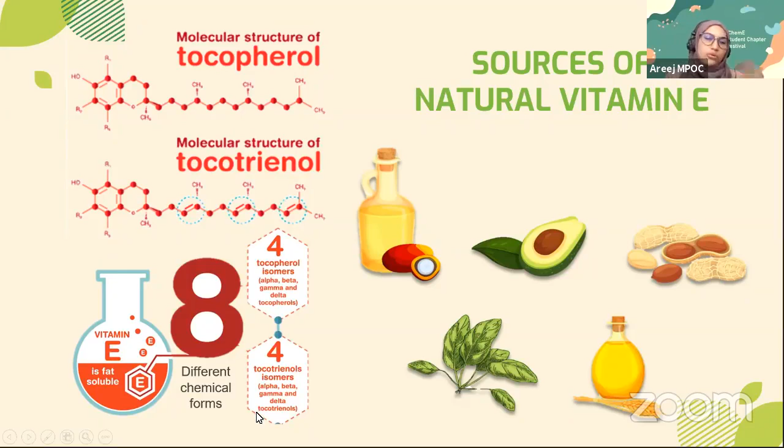So these are, in general, some of the potential health benefits of vitamin E. If you were to consume tocopherols and tocotrienols, or tocotrienol supplements for example, these are basically just the general potential health benefits.

However, it's really up to your preference as a consumer. Rice bran is good as well because it's exceptionally high in tocotrienol, vitamin E tocotrienol. However, there are also other health implications like hypocalcemia, where it can suppress the level of calcium in your blood. But then again, if you eat anything in moderation, it shouldn't be a problem. So if you eat palm oil in moderation, or anything in general, it shouldn't be a problem.

According to a study, tocotrienols exhibit higher antioxidant ability than tocopherol. So basically, if your main concern is the antioxidant ability of a particular nutrient, then you should go for tocotrienol rather than tocopherol.

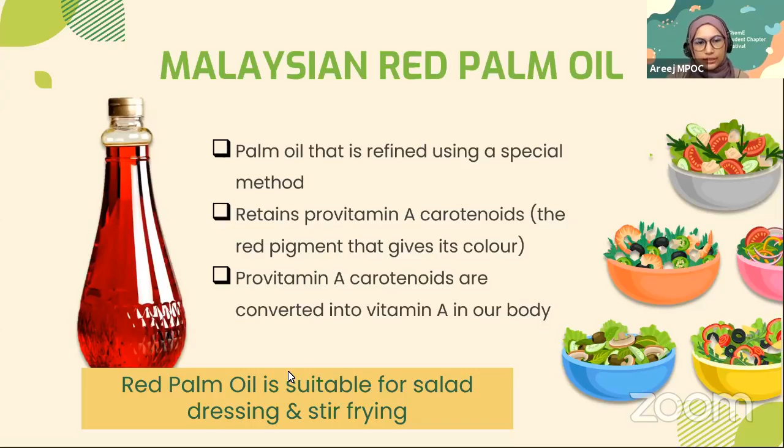You'll be surprised to know that compared to other fruits and vegetables, red palm oil has higher retinol equivalents - 50 times more than tomatoes, 44 times more than leafy vegetables, 15 times more than carrots, etc. Contrary to what the media always says about consuming your carrots, in fact you should consume your red palm oil - the carotenoids are way more potent, at least 15 times more than in carrots.

Other than that, red palm oil, or RPO, has been proven by many studies to be very beneficial for lactation. It decreases incidence of maternal anemia, increases alpha and beta carotene in breast milk and maternal and infant plasma, and increases retinol concentrations in lactating mothers. For fetal development, you would need a good supply of vitamin A, but not too much, so you can always do your own research on this. If you need further reading, it's also available on our website as shown here.

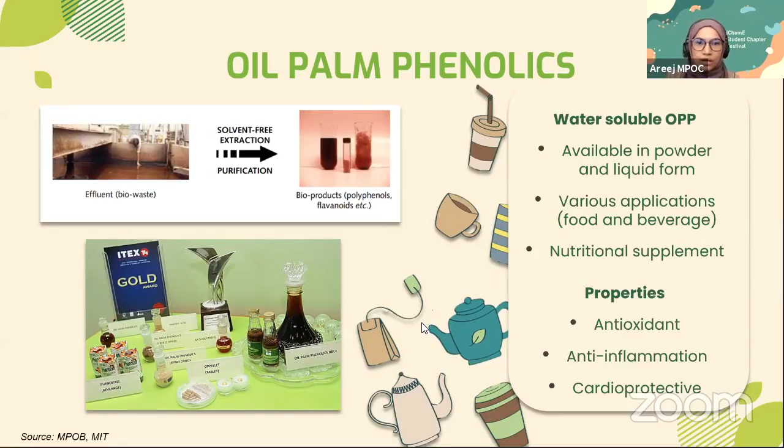I did mention a little bit earlier about saturated fatty acid correlation with cardiovascular health. More than 180 nutritional human studies evaluating palm oil, conducted by leading research institutions around the world, have been done. When palm oil is incorporated into the daily diet, where total fats are consumed at WHO recommended levels, palm oil does not increase total blood cholesterol or the bad cholesterol, LDL.

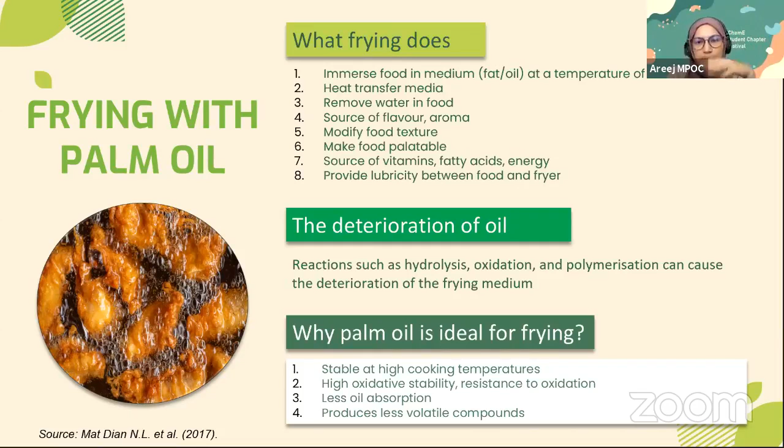So why at the end of the day do you fry with palm oil? Why is it ideal for frying? Number one, as mentioned many times before, it's stable at high cooking temperatures - at 150 to 180 degrees, still steady, you can fry with it. It has high oxidative stability, resistance to oxidation, less oil absorption, so it's less susceptible to polymerization, making food less greasy. And it produces less volatile compounds, so you won't see as much residue sticking onto the wall as compared to frying with other types of oils.

You'll be surprised to know that you can use palm oil for baking as well. As shown before, you can make margarines and shortening with palm oil, so you can use it to create all sorts of desserts and delicacies.

The role of fat in baking, generally, is as a heat transfer agent, but it also provides tenderness and improves overall texture, where the oil or fat aids the formation of air pockets, let's say in bread. So when air pockets are being formed, the oil improves the texture and structure of the air pockets, so air retention is better. You get a nice shape of bread - when you look at a loaf, the bread will rise as you bake it, due to a lot of factors: the retention of air, the structure due to oil, and the formation of gas from the interaction of yeast with sugar. So palm oil aids the whole process and improves the overall texture.